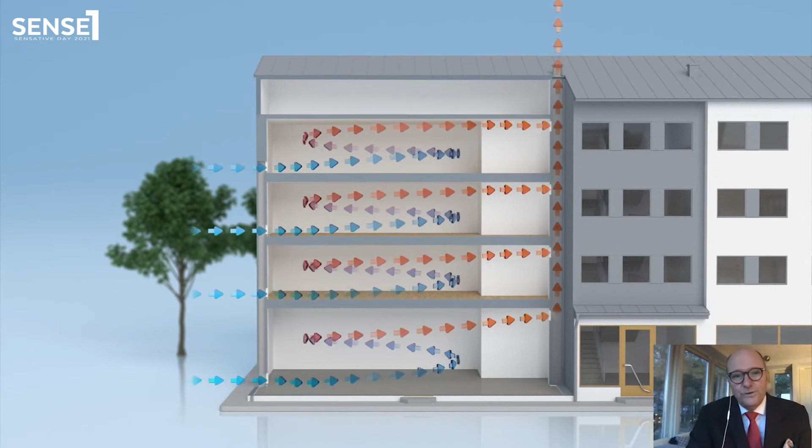If you move inside a house, we do climate simulations, so you can see how warm or how cold it will be during summer or winter. We also have daylight calculations when we design houses. Of course, we do the investigations when the house is ready. You can do the energy declarations and the system for maintenance.

And all this design we can do regarding the Swedish system, Miljöbyggnad. We also have Svanen. If we come to Britain, we have the BREEAM system, and for the US, of course, the LEED. And we're working quite a lot in China, and they have a system called Green Star. So we've been working with these systems for this period of 30 years.

Some reference cases that we have done: now we're working with Electrolux, their headquarters in Stockholm. They will build up to 80,000 square meters. There's an existing house and a new part, and this project has the vision of zero carbon dioxide by 2050.

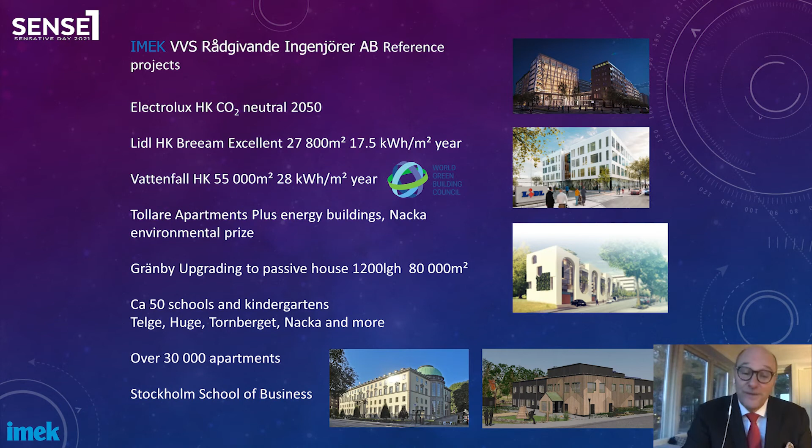We've done some plus energy houses in Stockholm, and got the reward in 2018, the Nacka's Miljöpris, for plus energy houses. We've done a lot of retrofitting, 1,200 apartments in Uppsala, getting them to passive house level for energy. And schools, of course. Over these 30 years, we have designed about 30,000 apartments total, so about 1,000 each year. We have some experience about that.

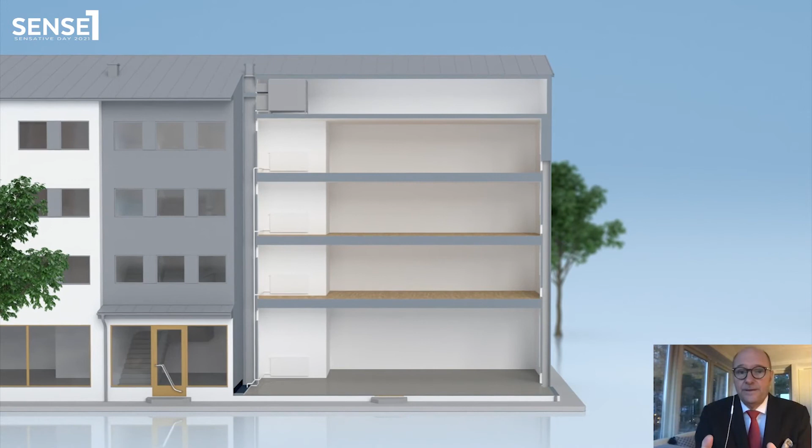To get these plus energy houses, because that must be the target in the future, we need knowledge about the climate shell and technical installations, to simulate them, investigate them, and also have a system for checking what's happening in real life.

And there we have the Sensative control system, the BMS system. We have it in the manufacturer, measuring temperature and humidity when we transport them, then on site and in a maintenance phase for the next 100 years, I would say.

This plus energy house design and construction is possible due to years of product development, of course lower cost, and the key issue is of course knowledge.

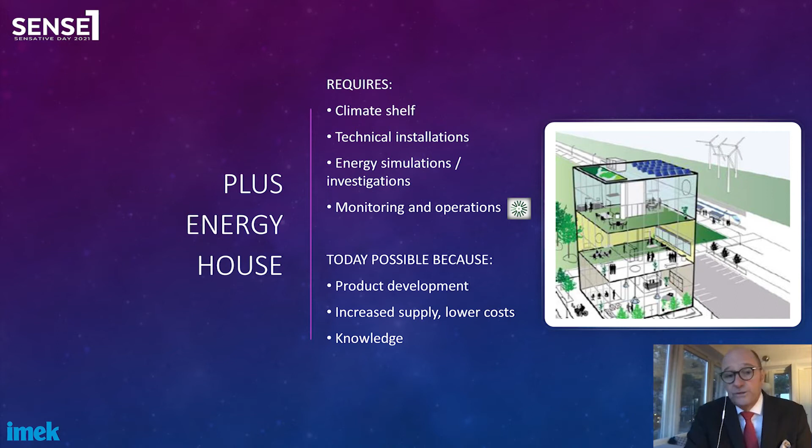When we come to the second part, the installations, of course we do this in existing buildings for energy savings. You can install heat pumps and so on, and we are project leaders for that. We do the construction on site.

That's air handling units, exhaust air heat pumps, geothermal heating, geothermal cooling. You can do sewage recovery, solar cells, solar heat, and the best one is actually the combination, the PVT panel - photovoltaic and thermal panel. We have a special system called the HIS system, which is a development of all these products put into a prefabricated running system.

So you push the button and then it's up and running. We do individual measurement, so you can also send an invoice to the tenant. The climate shell, we can change windows and so on, and we really work with indoor climate.

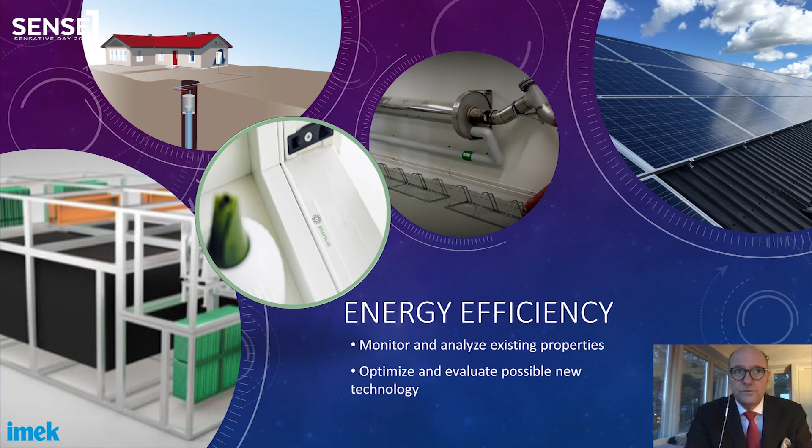We do that in Sweden, Akelius Fastigheter, in all their apartments. We install the Sensative system. We've done this for two years now, and we found out that this was the most efficient system on the market.

This is an example of an existing building. Normally, to the left, you take in outside air, you heat it up, and you put it out for the birds - that's traditional. 80% of the real estate works like that. So if you just put in an exhaust heat pump, you take the heat and put it back into the heating system and the hot water system, so that's very good efficiency, and it's profitable.

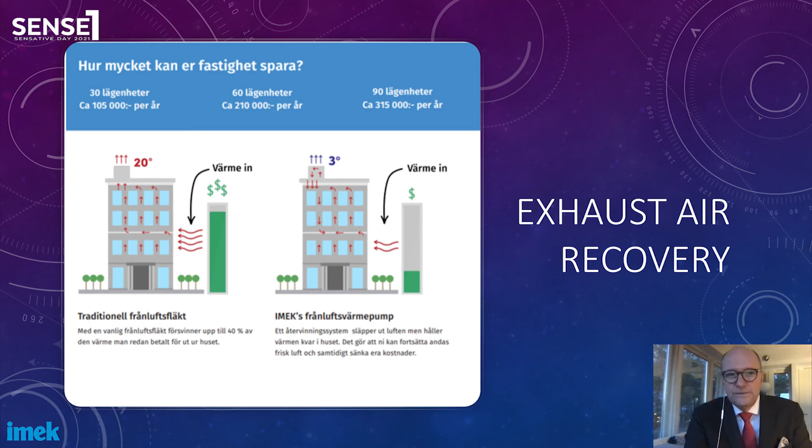We say sustainability is profitable, and in figures you can see that for 30 apartments, the savings are about 100,000 per year. For 90 apartments, 300,000 per year. So sustainability is profitable.

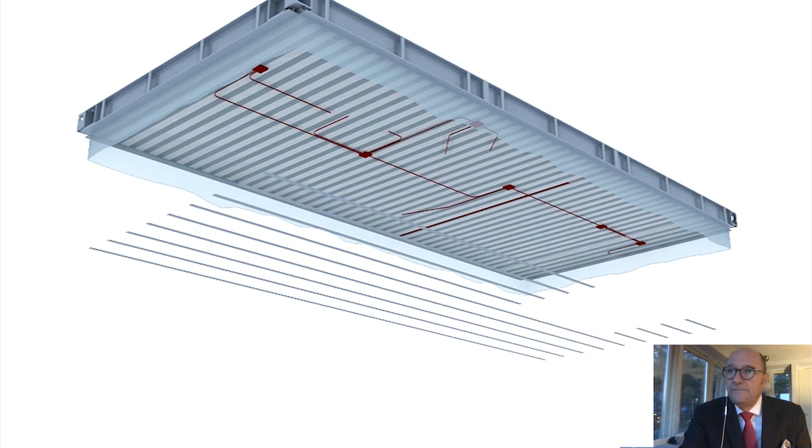We come to the third part, and that's industrial manufacturing - of houses, offices, schools, whatever. The essential thing here is that we build with a standard that is quite high. You can choose that, of course, you can choose any standard, but you can't choose less than the lowest standard that we have.

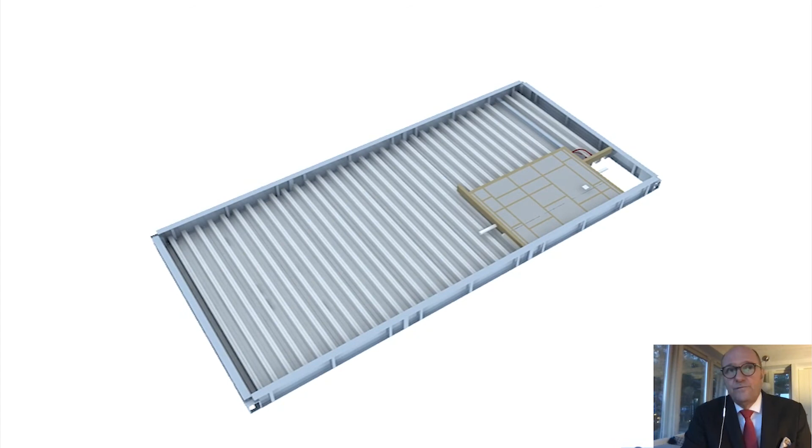And that's the standard we have in a premium apartment. We save time, normally half of if you build a house on site. So 12 months from handshake to when you can move in. The financial part is that you pay upfront 15%, and then you pay when the house is on Swedish ground.

Energy-wise, we say it's normally 50% of the demand, or even plus-energy houses, so it's a total low cost. These could be just words, and they are words, but it's also figures.